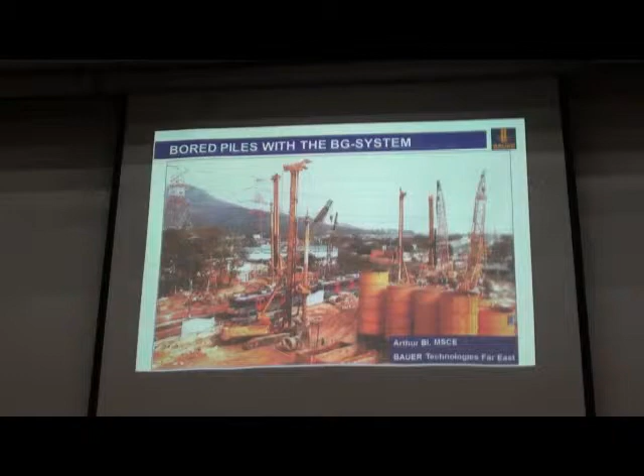In the second session, another 50 minutes to 1 hour, I would like to talk about the diaphragm wall. So let's start from the bored piles with the Bauer BG system.

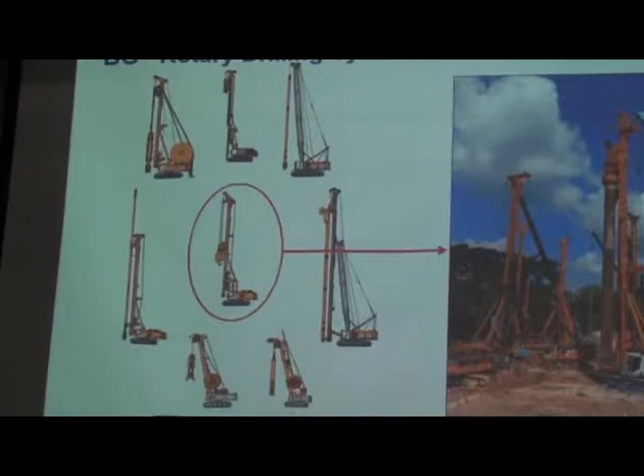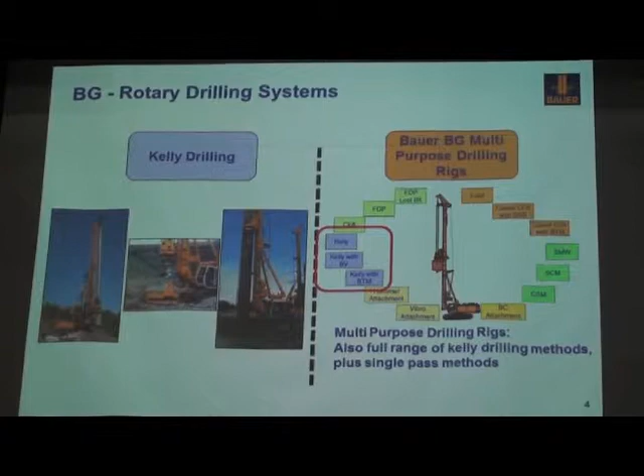There are also many different equipment we use for piling or boreholes. But this evening I only want to talk about BG, Bauer drilling equipment. In fact, the BG, Bauer BG, is multi-function equipment. You can have a lot of different attachments to do SMW or continuous flight auger, or even attach the cutter to do the diaphragm wall. But in Singapore or the surrounding area, I would say 95% or even more, we are only doing Kelly drilling. What is the meaning of Kelly drilling? It means you use the Kelly bar and the bucket or auger to dig the hole to make the piles. Or sometimes you have to install long casing, and for difficult ground conditions or big piles you may need an oscillator. So this evening I only cover what I call the Kelly drilling system.

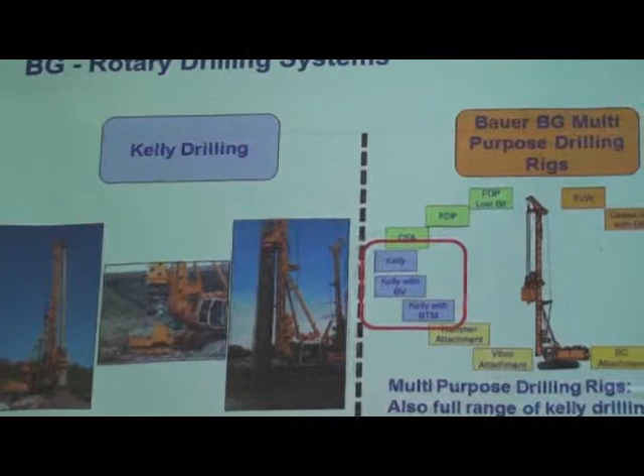So the typical method used in this foundation technology produces cast-in-situ bored piles for foundation piles, bridge piles, or you can also use this piling technique to make the wall, like a retaining wall, which we call a secant pile wall. It's also common in the market.

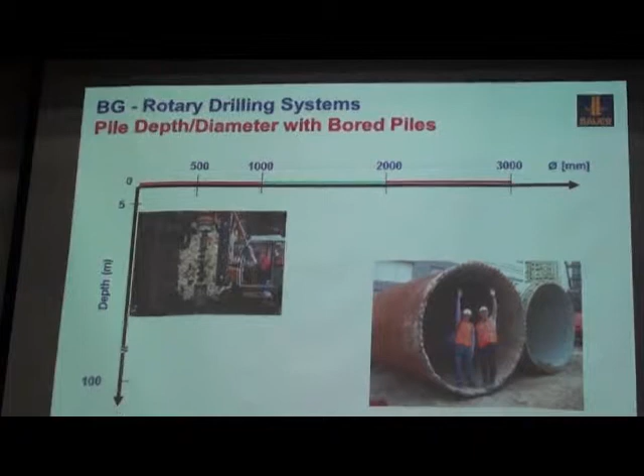How about the pile depth and diameter with this kind of method, bored pile drilling by BGs? For Kelly drilling, normally we talk about from 500 millimeters to a maximum of about 3 meters. In very special cases, 3.5 meter diameter piles have also been done in Singapore, on Market Street. The depth, nowadays with big machines, you can go down to 100 meters, or even 120 meters deep, by this kind of Kelly drilling method with drilling rigs.

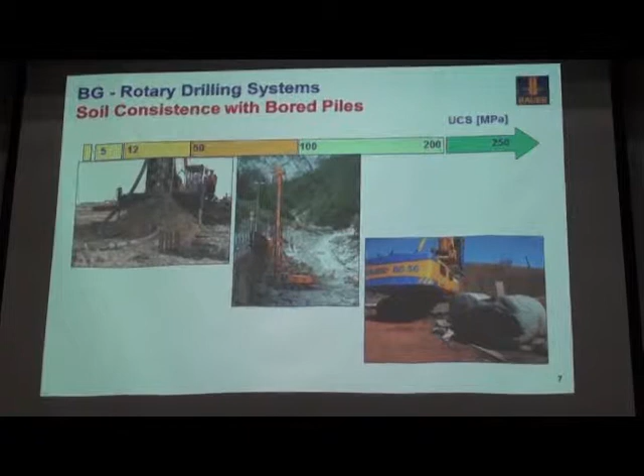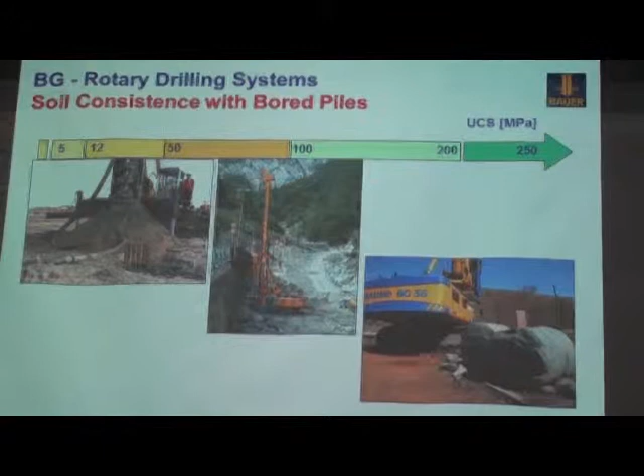How about this application with different soil conditions? For soil, or less than 5 MPa, I consider that the easy part. Then we come to fractured rock, up to about 50 MPa. UCS here means unconfined compressive strength of the rock. From 50 to 100 MPa, normally we call it hard rock. From 100 to 200 MPa, very hard rock. From 100 to 200, normally in Singapore we are talking about G2 rock already, or even sandstone boulders. I think the maximum rock strength drilled by this kind of method, Kelly drilling by the BG, would be about 250 or even about 300 MPa.

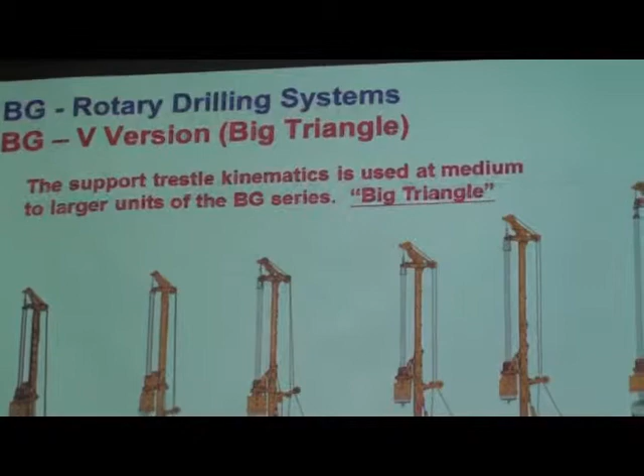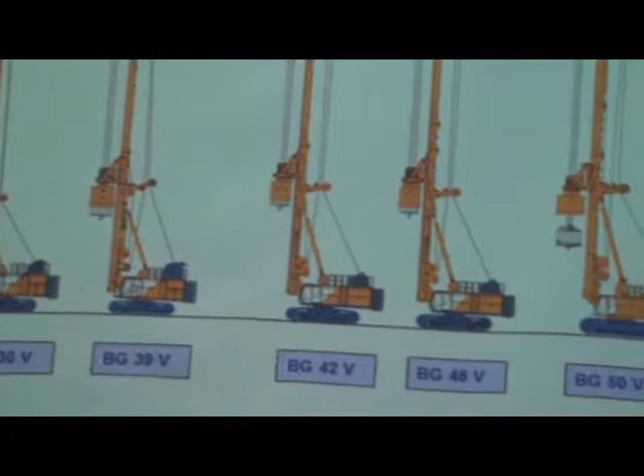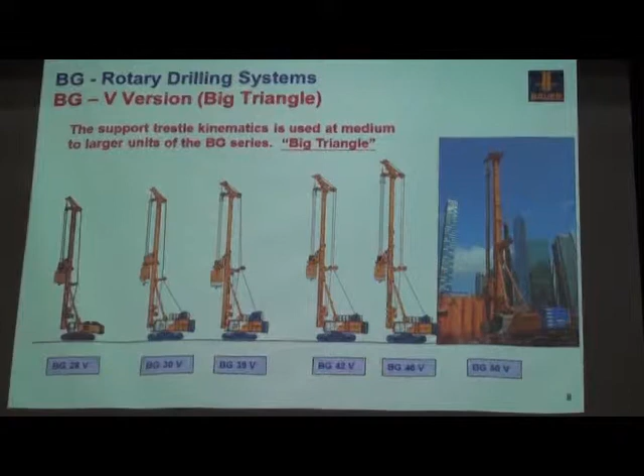In Bauer's production line of BGs, we have 2 production lines. First, I call it the V version. For the V version, first we look at the support kinematic system, or what we call the big triangle. What's the meaning of the big triangle? You can see the support system from the side. The big triangle supports the machine, because especially when doing big diameter or hard rock drilling, you need very strong support for the machine and the mast to resist vibration. The support system is not only from the side but also from the back, so this big triangle means you have big support from the side and also from the back. This is one of the machines, the BG46, used in Marina South to drill 2 meter, or even up to 2.5 meter diameter piles, down to 100 meters or 105 meters deep.

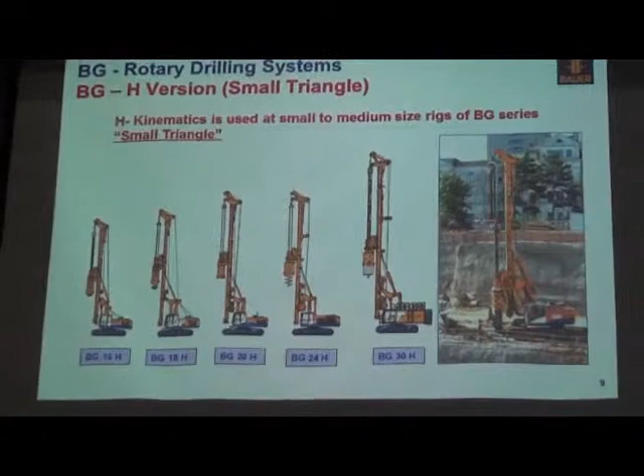Another production line I call the H version, or small triangle. If you look at the system, the supporting triangle is much smaller from the side and also from the back. This is the small to medium version of the BGs. In the market, just talking about Singapore, I think we have about 120 or 130 BGs working in Singapore.

I would say nearly 99% or 100% are V version, because here we have hard boulder, hard rock, and even very big diameter piles.

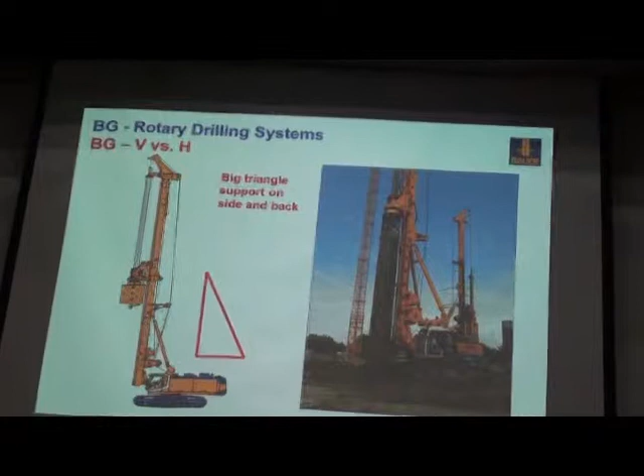So let's look at another comparison: big triangle and small triangle, not only from the side but also from the back. I think it's easy to make the example: a man or guy standing wider and lower is more stable. Big triangle versus slim, small triangle - the small triangle is not so stable compared with the big triangle.

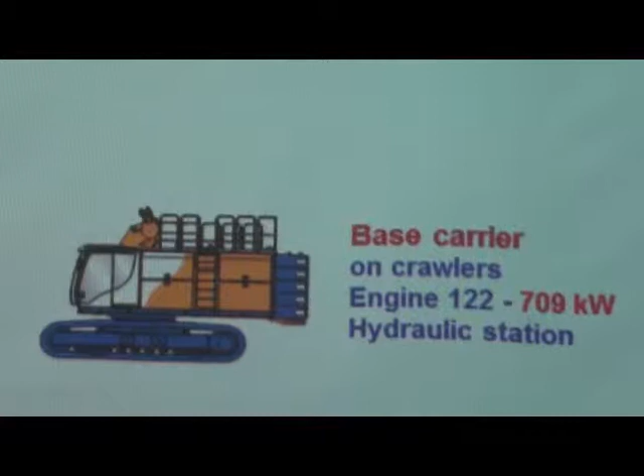So let's look at the BG main components. First, the base carrier, which is on crawlers so it can move to any place easily, with the engine supplying required hydraulic power. Nowadays, the big BGs have engines up to about 700 kilowatts.

Then we need a mast. The mast connects to the base carrier and extends to the required height to provide enough height for drilling deep piles. One important thing is it must be torsion resistant, because when drilling hard piles, especially hard rock, the reaction will for sure make your mast shake. So this must be torsion resistant.

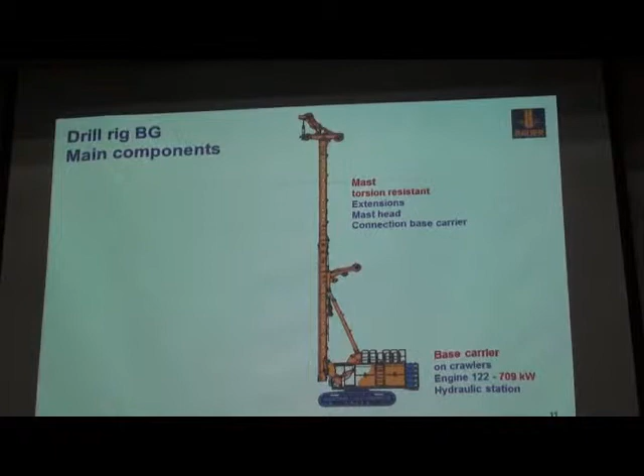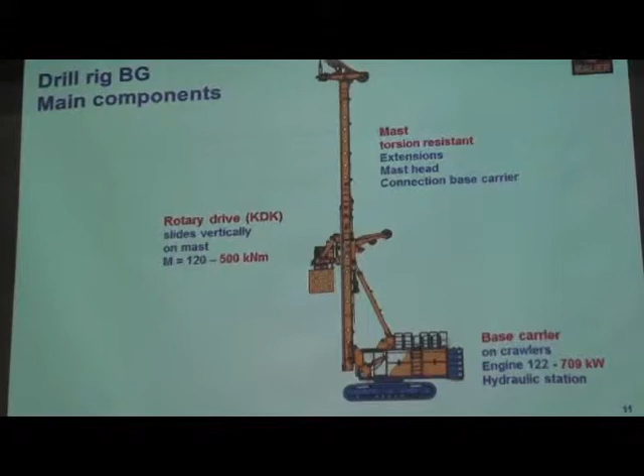Then we come to another key component, the KDK, or rotary drive. The rotary drive slides along the mast to provide the required torque for driving the casing or the Kelly bar to drill the piles. This KDK can provide 500 kilonewton meter torque for pile drilling or installing casing.

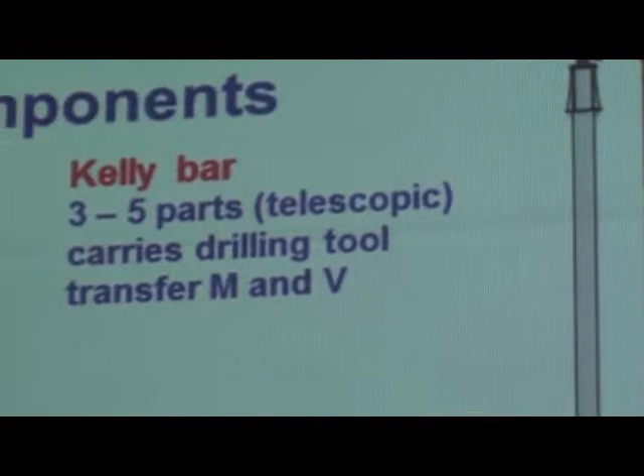Then we need the Kelly bar. The Kelly bar is a telescopic, either 3, 4, or 5 parts, extendable, to transfer the required torque and vertical force to drill the piles. Then you also need the drilling tools, which depend on the soil or the rock. You select the tools accordingly - later I will give more details.

Then you need the main winch. The main winch nowadays can go up to 600 kilonewton, meaning single line pull up to 60 tons already. This is because a lot of big piles are needed for high-rise buildings or even for bridge projects.

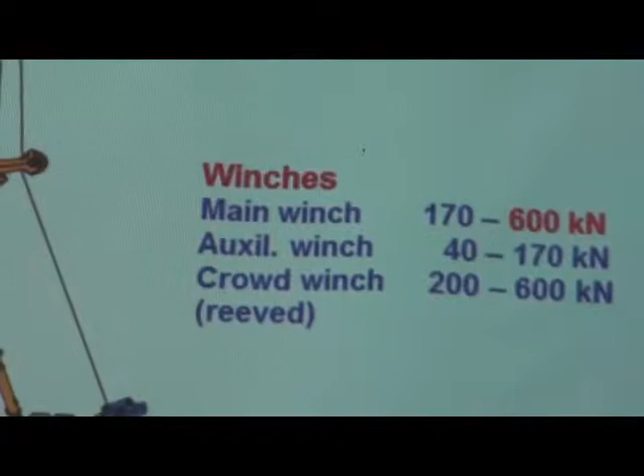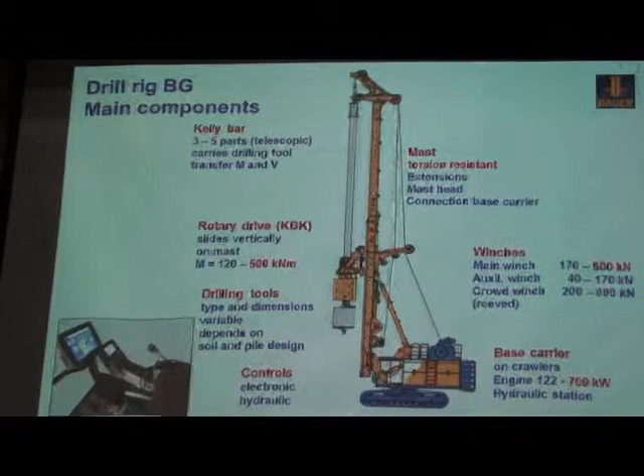Then the control system for hydraulic and electronic control of the pile drilling, with a visualization monitor. Any operator, anytime, can see the depth, torque, everything - it's easy to control the whole process.

So let's take a few minutes to look into the details of how this slurry pile has been done.

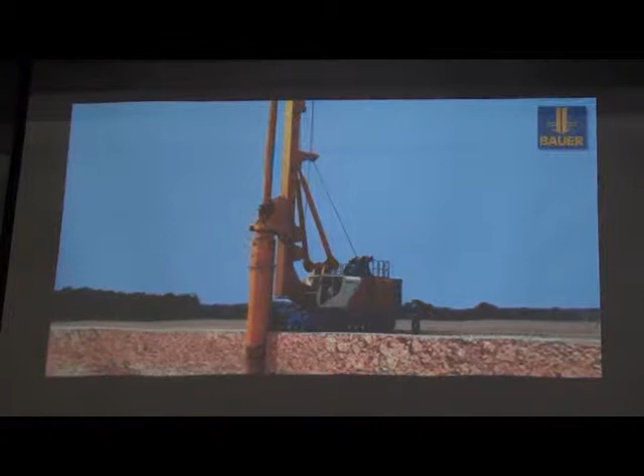First, for the slurry pile, you need to drive in the top casing, normally installed until the stable ground. This part we call KDK, connected with the casing drive adapter to drive in the casing. Then you start to drill. Of course, for the slurry pile, you need some tank or silo to supply the slurry during the drilling process.

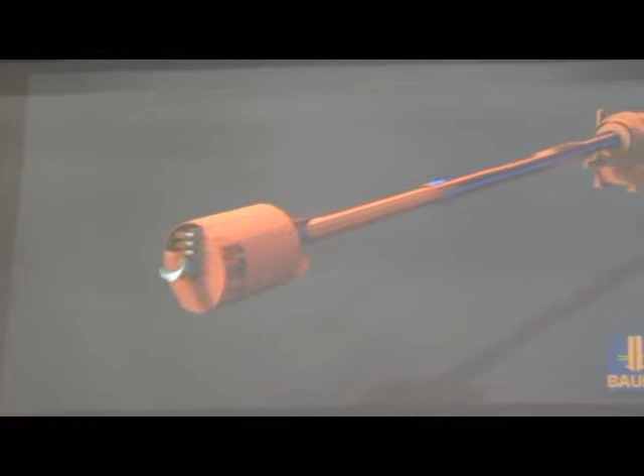This shows how the Kelly bar works. This is the KDK rotary drive, and this is the Kelly bar, a telescopic type Kelly bar. You lower it into the ground with a bucket. Then we need to lock it, because we have to transport the required torque and push force into the Kelly bar and the tools to drill the soil or even the rock.

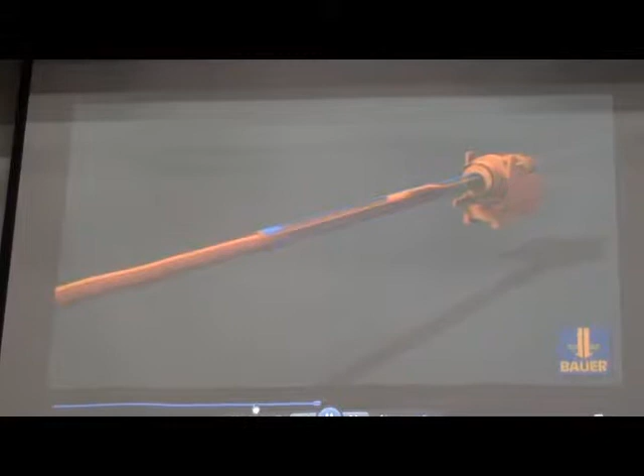After you drill one bucket, about 800mm or 1 meter, you unlock the Kelly bar, then retract it. You just repeat the whole process to complete the piles. During the drilling, you always fill the borehole with slurry - normally we use bentonite slurry.

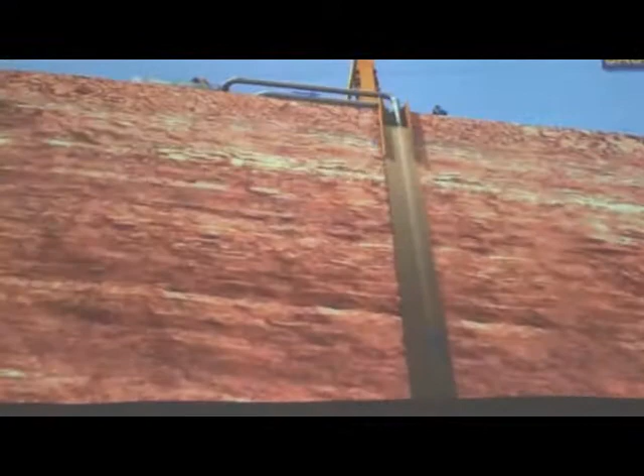One important thing for good pile quality: after you finish the pile drilling, we call it recycling. Because a lot of fine material is suspended in the slurry, you need to recycle it to keep the bentonite in good quality before installing the rebar cage and concrete.

In this recycling system, you pump back the thick slurry through this desander unit, filtering out all the fine material, then bring back better quality bentonite, or even supply the borehole with fresh bentonite. Then you install the rebar cage and do the concreting.

For the rebar cage installation, you can use the BG, but most of the time at the job site we prefer to use the crane, because we like to keep the BG busy, always in the drilling work.

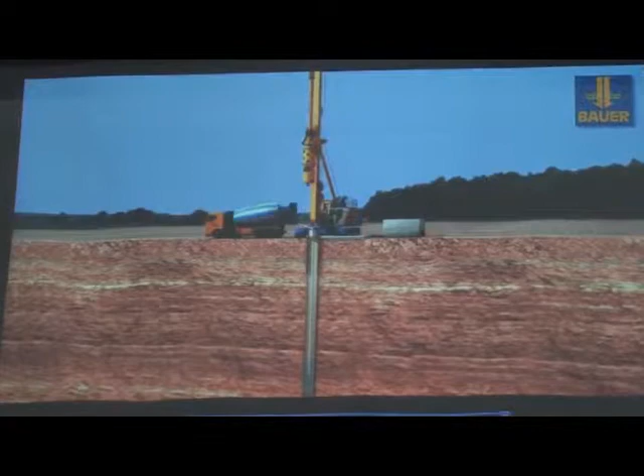So after you finish the concreting work, you use the BG, or sometimes the crane, to remove this top casing, and then you start another pile.

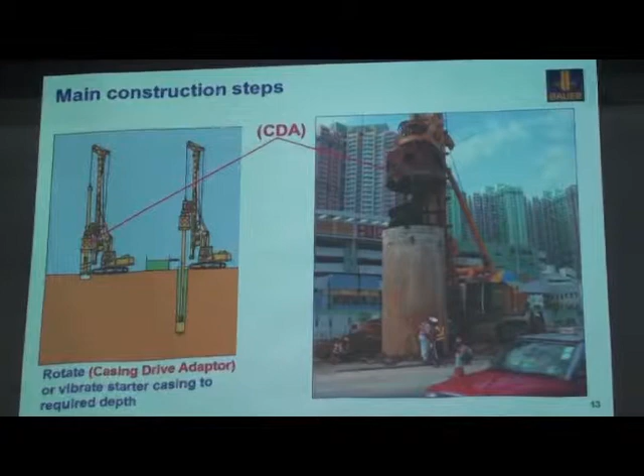Okay, let's look at the main construction steps, how we make the piles. First, you use the CDA, casing drive adaptor, to install the casing. For some projects, if the casing is very long or the diameter is big, then you may also use this top, I call it top vibro, to install the casing.

Then you start drilling. During the drilling, you always fill the borehole with the bentonite.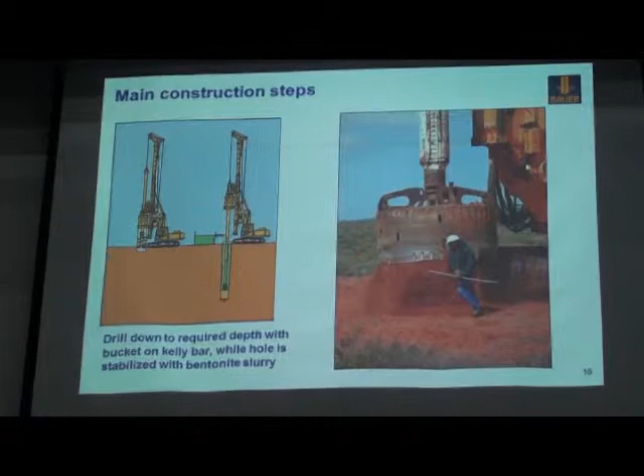Why I like to show these photos, I think I made last year in JB. You can see two big machines, BG46, very big machine, about 230 tons, drilling the big piles. One is just starting with the auger for the casing installation. The other already drilled down to about 50 or 60 meters with the big bucket.

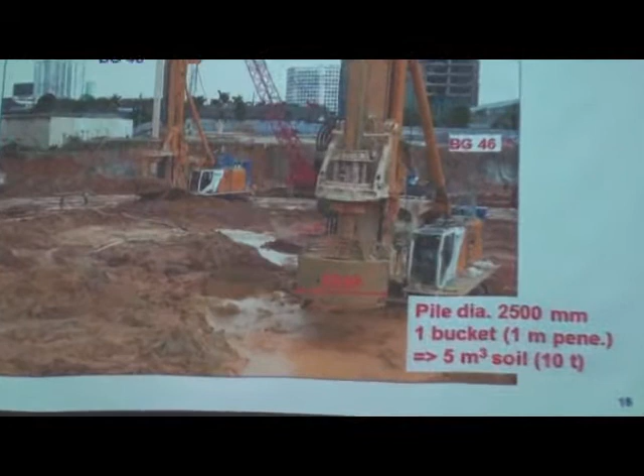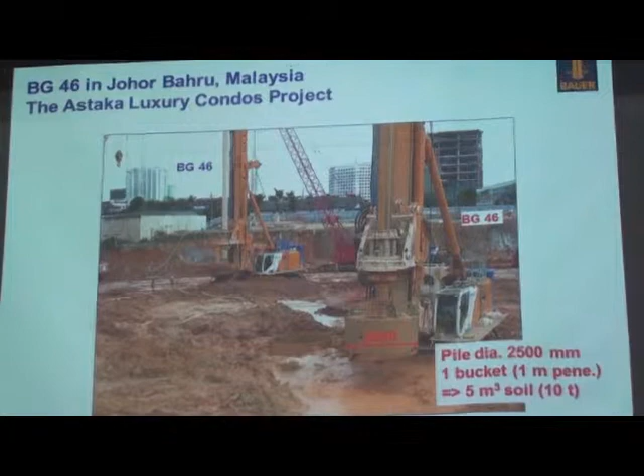And full of site, it's a mess. But please consider, for this kind of job, 2.5 meter bucket each time - if we drill 1 meter, we are talking about 5 cubic meters of soil, and 10 tons. So after a few buckets, if logistic arrangement on site is not proper, this is what you can see. So for the big piles, not only the drilling, but how to remove all this disposal is very challenging to the contractors.

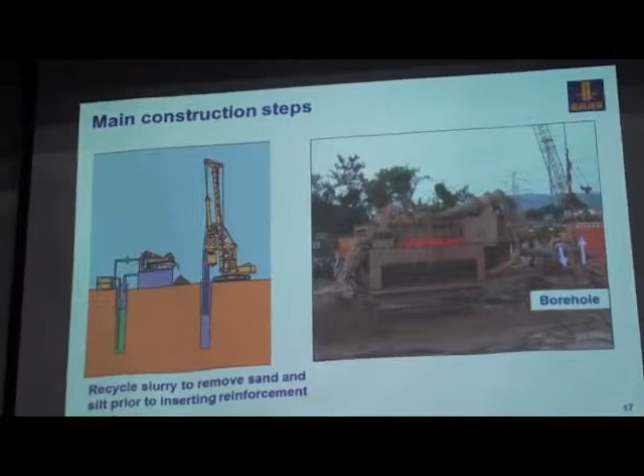Then after you finish the pile drilling, this is what I just mentioned, you need to do the desanding. You pump the thick slurry from the bottom through the desander, you filter out the fine material, sand, then you keep the bentonite in good condition before you install the cages and do the concrete.

Then, after desanding the pile, we lift the cage, normally by the crane, and do the cage installation. Then we do the concreting. During the concreting, the slurry will be pumped back to the silo or the tank.

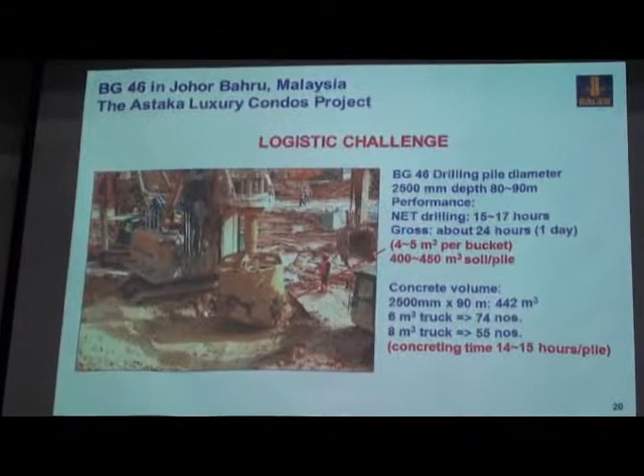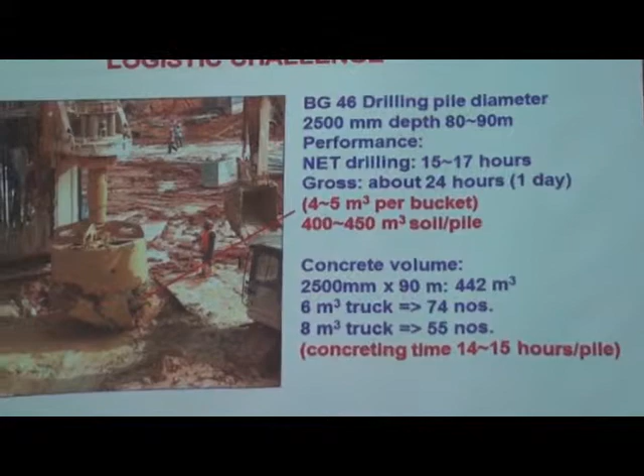This is another same job site. I think nowadays, especially for this big diameter pile, 2 meters or above, we are talking about 50, 60, even 80, 90, 100 meters. It's very challenging. For the contractors, no matter if it's the main contractor or even the pile contractor, how do you do the proper logistics - first, how you arrange to send out this disposal.

This project, no hard ground. Every day you can finish 1 pile, 1 machine. It means about 450 cubic meters of soil. So 2 machines in 1 day can easily generate 1,000 cubic meters of soil on site.

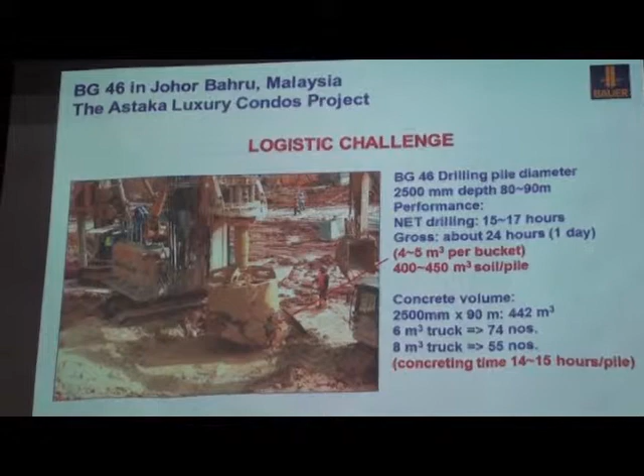Second, if we look at the concrete volume per pile, we're talking about nearly 450 cubic meters. And how many trucks required? A 6 cubic meter truck, you need 74 numbers. An 8 cubic meter truck, you need 55.

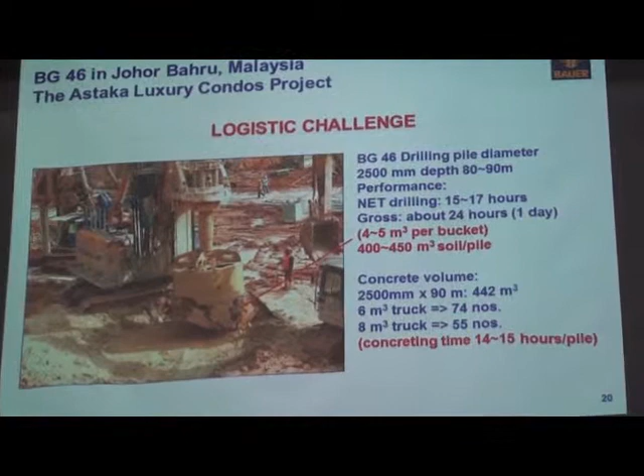And once you start this concrete process, you cannot stop. So each pile, only the concrete time, you need about 14 to 15 hours. I think this is really the big challenge when we are talking about this big pile drilling.

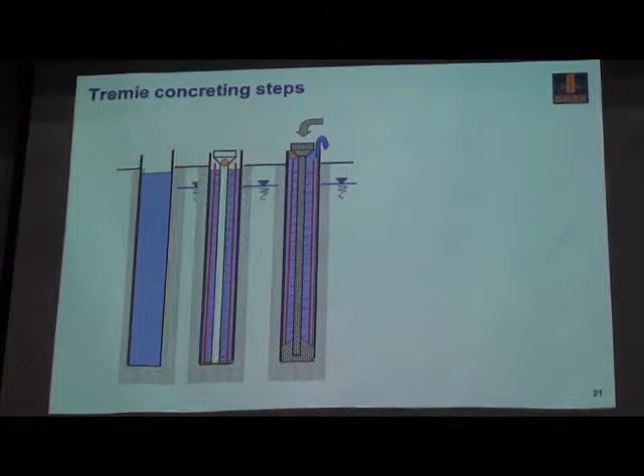So, tremie concrete. You finish the pile, we install the tremie pipe, the hopper. Normally we have the rubber ball to separate the slurry from the concrete. And you start pouring the concrete, then pump back the slurry to the storage tank or silos. Then from the bottom, gradually concrete to the top. Then you finish the pile concreting.

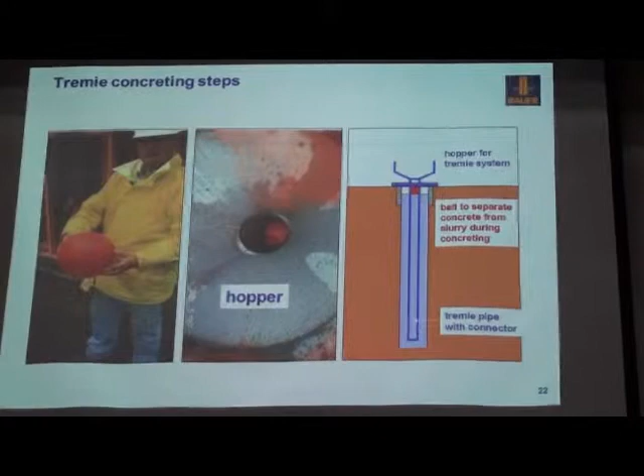And this is the detail - what's the rubber ball look like? Its function is to separate the concrete from the slurry during the concreting.

We are talking about soil drilling. How about rock? I think in Hong Kong or in Singapore, a lot of the areas we encounter the rock, especially with some designs purely end bearing, so you have to go into the rock.

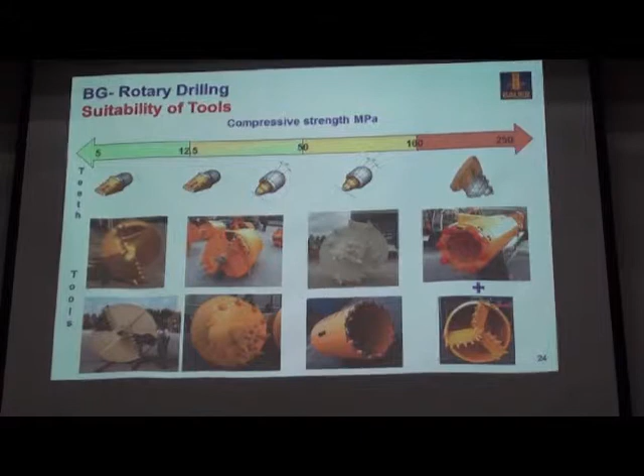Then it's important to understand how we select the tools or even the teeth for soil drilling and for rock drilling. This chart shows you the different types of teeth. Starting from this type, I call it flat teeth, which works for normal soil until the rock strength about 15 or even 20 MPa. Other than that, we need the bullet teeth, or we call RSC teeth.

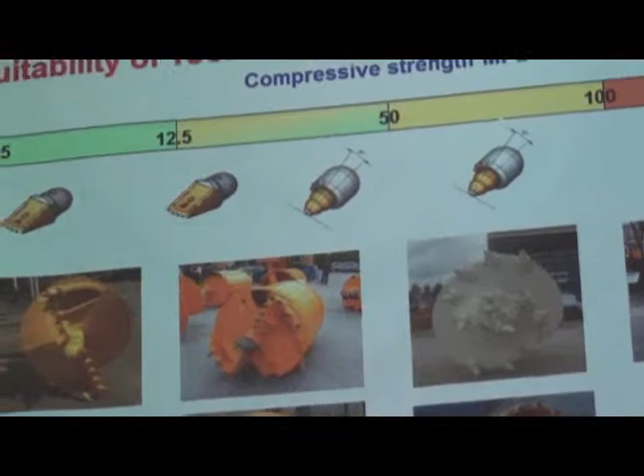Then from about 20 to 80 or 100, of course, depending on the different type of teeth, you can have different type of tools like the auger or the bucket.

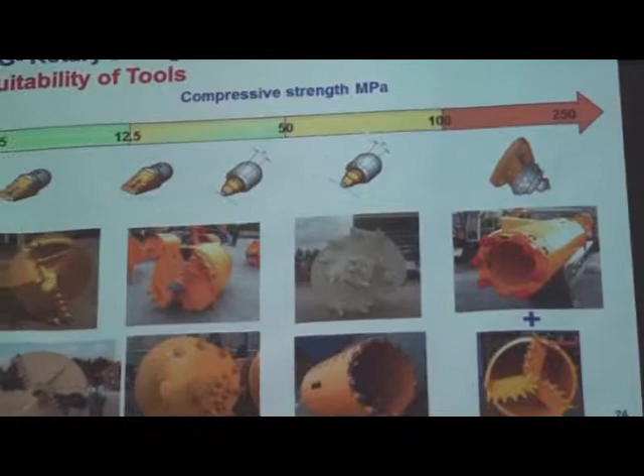How about the rock strength or boulder strength? More than 100. I think you can find in Singapore even boulders or G2, or even sometimes G3 or more than 100. Then we need roller bit, and even the cross cutter. Even these tools combined to drill into the hard rock efficiently.

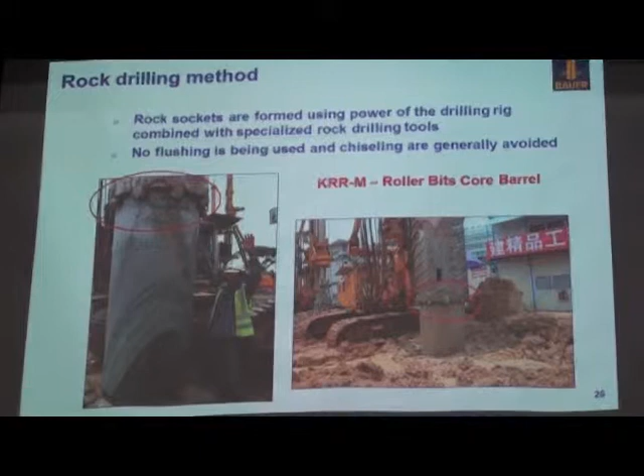So for the soil drilling, we need the tools and the teeth design to have high penetration, but you don't need the big force, high torque. But when we look at hard rock, no matter it's a boulder or very hard granite, we are talking about rollerbit. It's the key weapon when you are dealing with this kind of very hard rock.

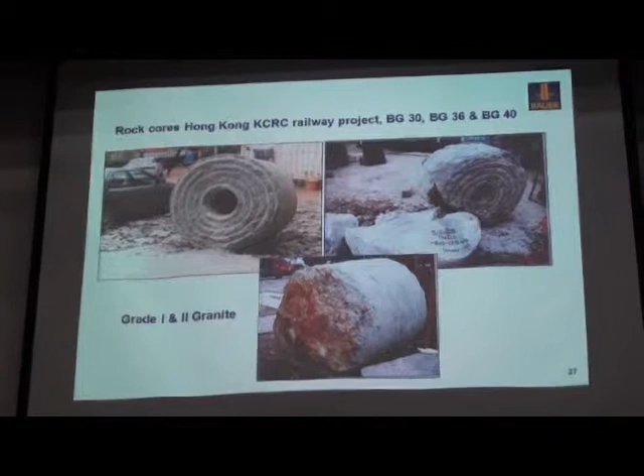This is the hard rock drill in Hong Kong, KCRC. We are talking about, I think the Hong Kong spec is very similar to what you used in Singapore, called the G1 or G2 granite. I think G2 granite can easily go up to 200 MPa.

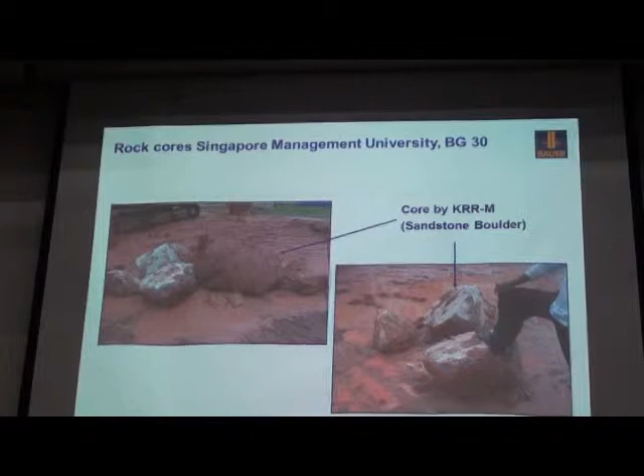How about Singapore? I think Singapore is very famous for the powdery clay. This is the first project I got involved in, in the year 2003, as a new project. I still remember the first day I arrived on the job site, the customer told me very hard boulders he encountered.

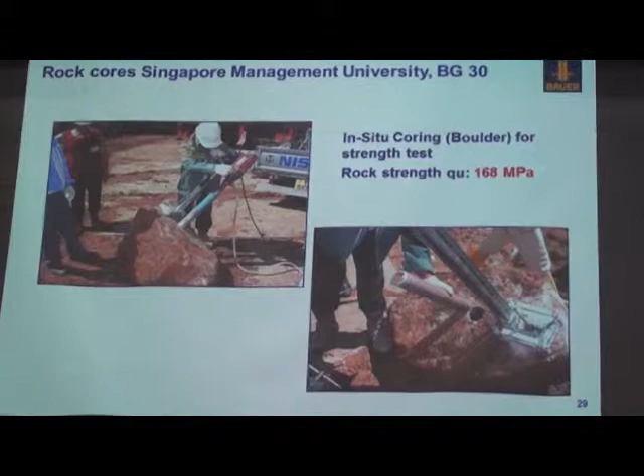Then I asked what's the strength. He said about 100 or above 100. So after we drilled out some boulder, we took it on site and tested it. Honestly speaking, it surprised me, the strength was up to 168.

Of course, in Singapore, we have G3 and also G2 rock. Especially G2, we are talking about the strength up to 150 or even 200.

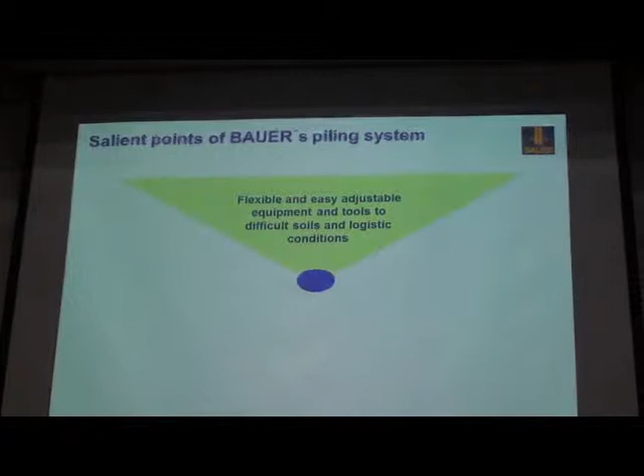So what's the salient points when we're talking about using the Bauer BG or piling system? I think it's flexible and easily adjusted equipment, and also with different tools to drill in not only the soil but also the hard rock. Short setup time, normally we're talking about 1 or 2 days.

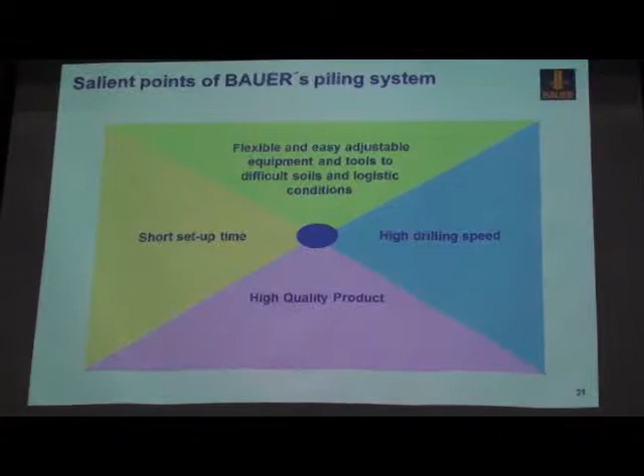You can get the equipment ready to work on site, and with high drilling speed, because of high torque and the big winch. And of course we are quite proud of our product, the BG.

Then I would like to talk about this, because it's bored pile. During the drilling we're talking about the bentonite slurry. In recent years, a lot of people have started to use the polymer. Why do I still want to talk about bentonite instead of polymer?

So tonight I still want to talk about bentonite slurry. In fact, bentonite has been used in this kind of work for more than 50 years. Bentonite is a special clay that swells and gels after it's dispersed. Normally we are talking about a mixing ratio of 3 to 5%, and after mixing you wait about 4 to 8 hours, or the next day you can start using this bentonite slurry.

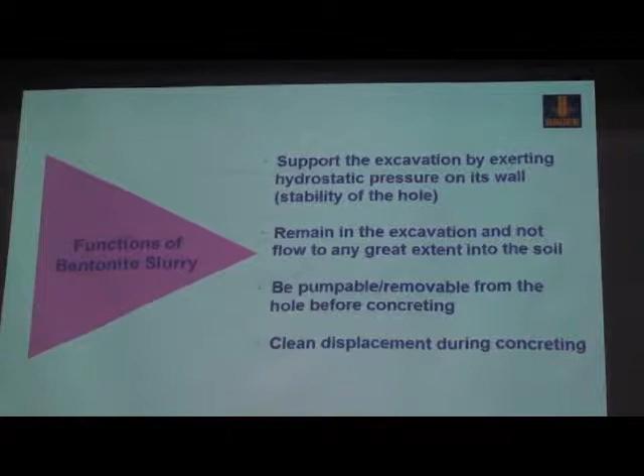The function of the bentonite slurry: first, to stabilize the borehole during the drilling. Second, the slurry has to remain in the excavation or borehole, not penetrate anywhere. And the third point, it should be pumpable before concreting. And during the concreting, the concrete should easily replace the bentonite. This is the function of the bentonite slurry.

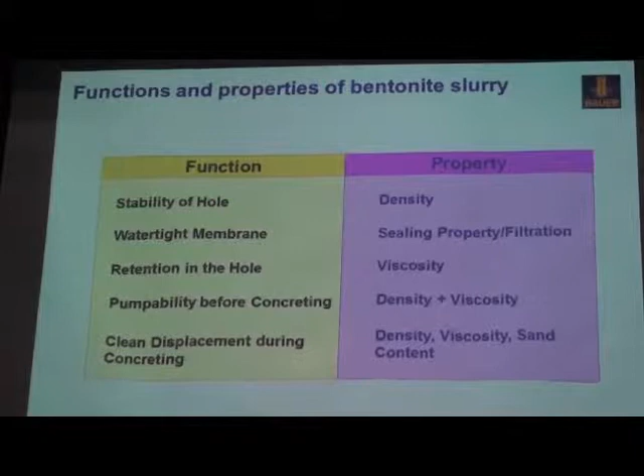Once we know the function of the bentonite slurry, then what's the property required for the bentonite, or what property do we want to check during the piling process? Here you can see we're talking about density and filtration, and sometimes density plus viscosity, and of course also sand content.

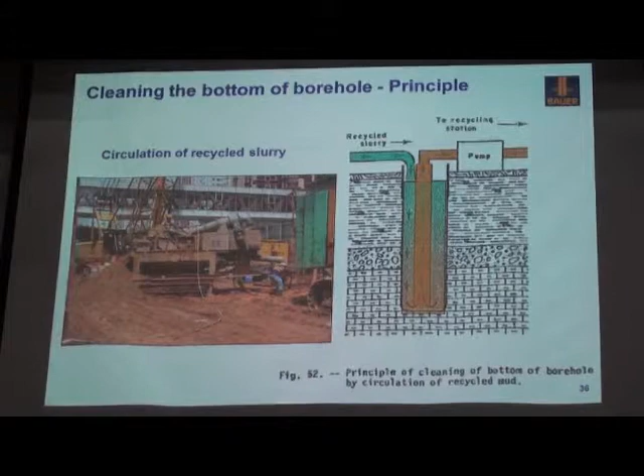Again, to have good pile quality, I keep emphasizing this recycling is very important, because we want to have good bentonite before we install the rebar cage and do the concreting.

This is to have a clean base. Then we have the pump to pump the thick slurry from the bottom and we supply the fresh or good bentonite to replace the thick or old slurry. And then here you can see all the sand are separated from the working bentonite.

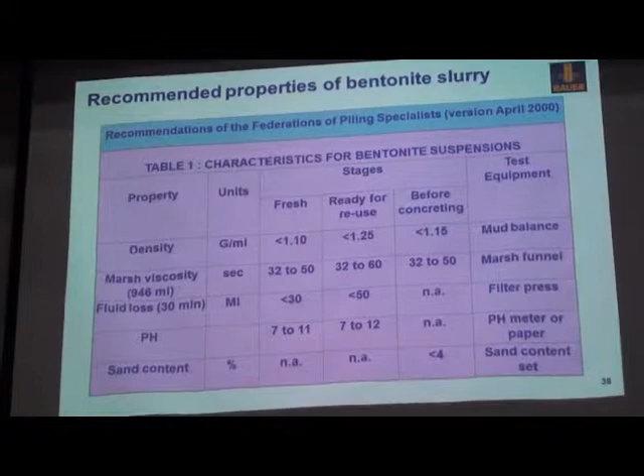What's the spec for the bentonite slurry? Here is the general recommendation from the Federation of Piling Specialists.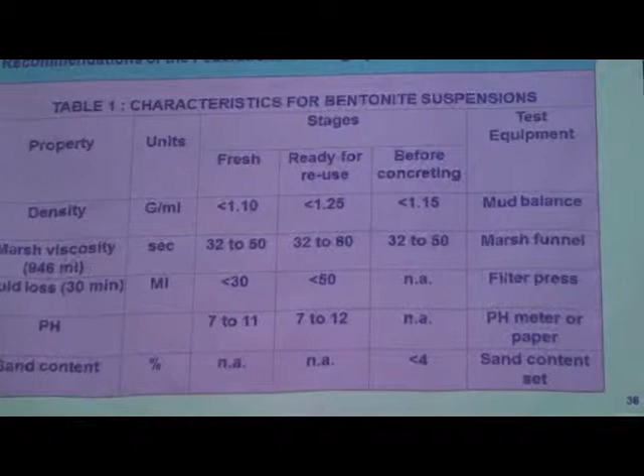Fresh, ready for reuse, and very important, before concreting you have to check the density, viscosity, and the sand content. Normally, if you do the proper desanding, the sand content will be less than 1%.

Quality control for the piles. Now I would like to talk about the quality control, the items for quality control. It may not cover all, but this is typical.

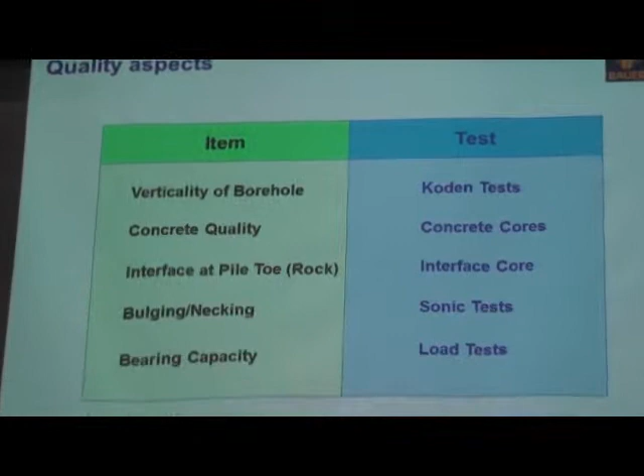First, some countries may like to check the verticality of boreholes. For bore piling, normally we are talking about the verticality requirement of about 1 in 80. Some special cases, we are talking about 1 in 100, but very rare. And most of the cases, they don't even check the pile verticality.

Concrete quality can check the cores. And interface - I think the interface at the pile toe, especially for rock drillings, is quite common. In Hong Kong, they like to take interface coring. And bulging or necking can have the sonic test. And for bearing capacity, the most popular, even nowadays, we still use the static load test.

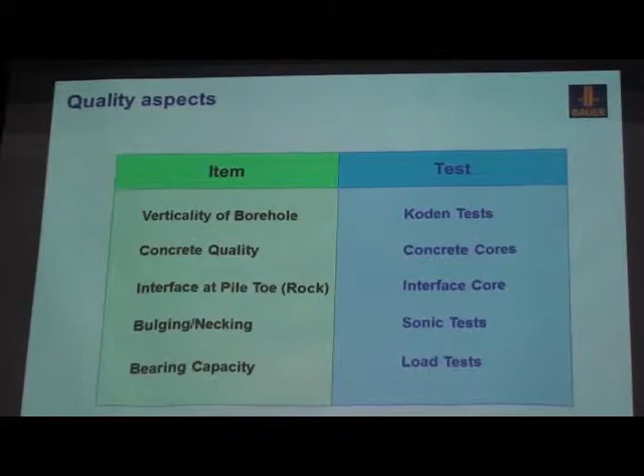This is the equipment used to check the pile verticality. In the past 30 years, even up to now, the industrial standard will be the Japanese product. There are also some other brands, even Chinese products, nowadays in the market. But to me, I would still like to recommend this.

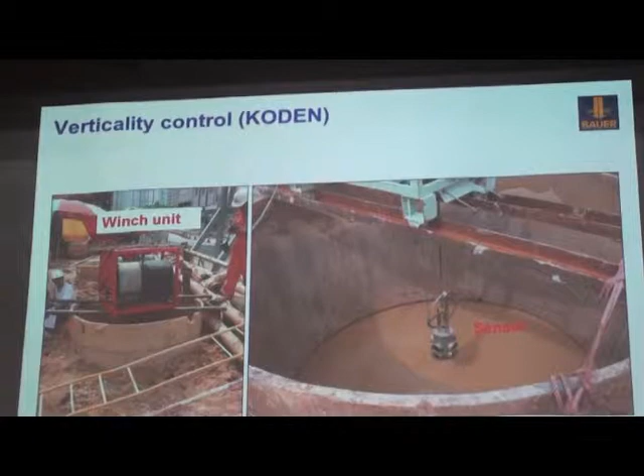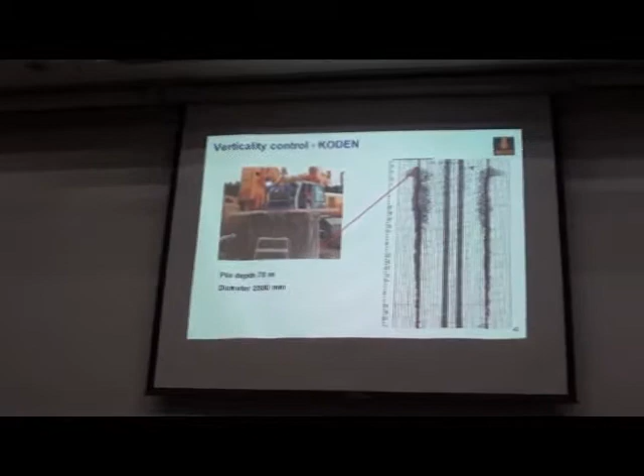Industrial standard, please, if possible, still use the Koden, it's more reliable. You have a sensor placed in the center of the pile. You lower it down to the borehole, and with a winch unit, you can check the pile verticality. This Koden can go down to about 108 meters deep.

And this is the top casing. You can see very clearly from the top casing the verticality. This is the concrete core to check the concrete quality of the piles.

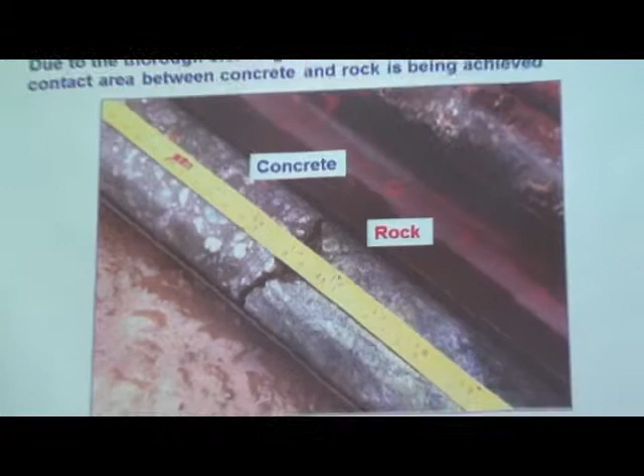After proper desanding, this kind of very clean interface can be reached, with nearly no sediment between the concrete, the pile, and the rock.

And I think the slump of the tremie concrete is also very important because we are doing tremie concrete and we need higher slump. Normally for this tremie concrete we are talking about slump 180 to 200 millimeters.

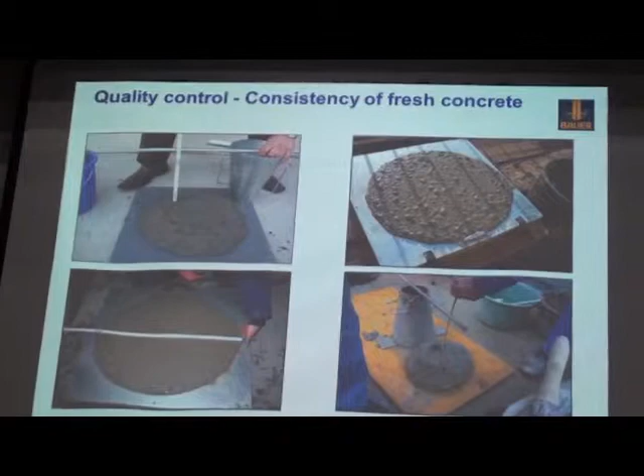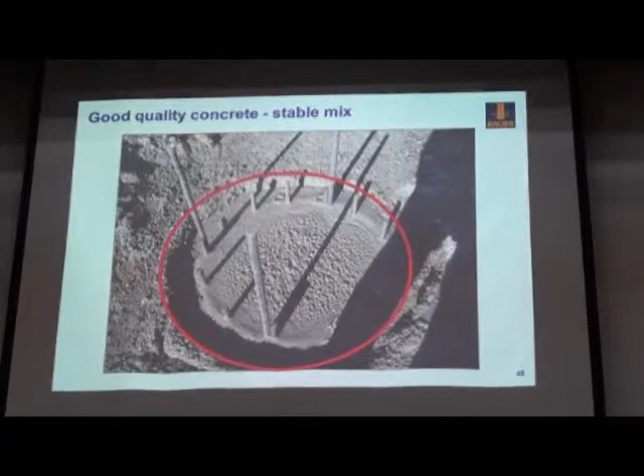This is very stable and good mix after you extract the top casing. This one, I think, has sufficient elasticity. Yeah, you can see it's very dry.

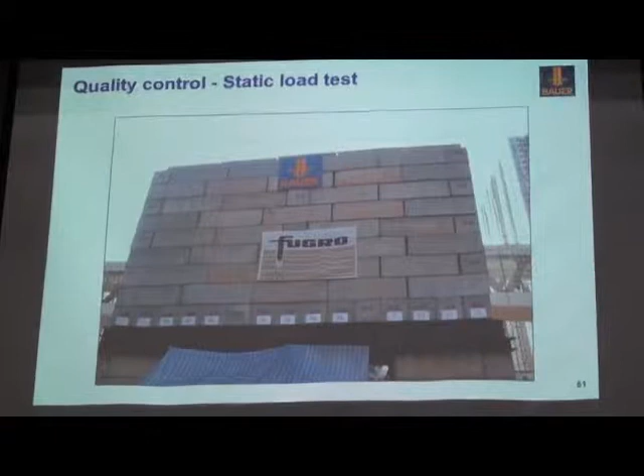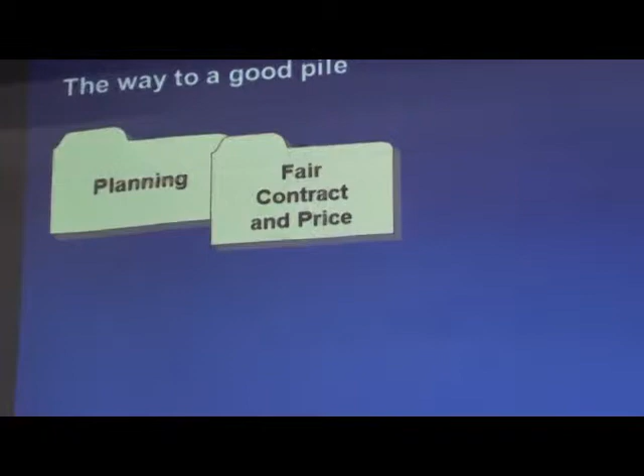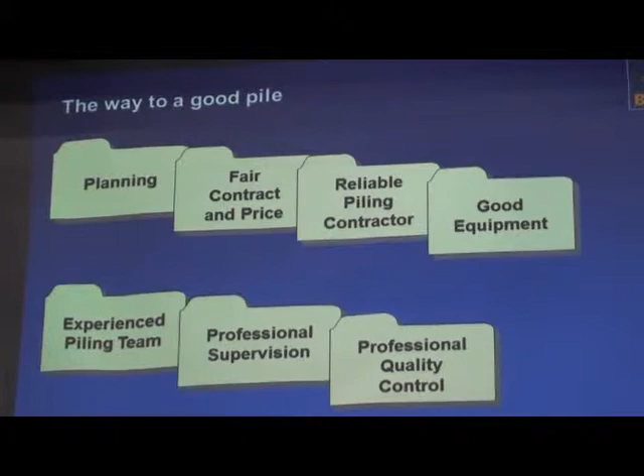So for a short summary, the way for a good pile, we're talking about bored piles, slurry piles - first, need good planning, fair contract prices, reliable piling contractors, good equipment that can drill not only soil but also hard rock, an experienced piling team including foreman, operator, banksman, and professional supervision, professional quality control. Then you can have good quality piles.

So after this bored piles topic, I come to the next one. I would like to have a short introduction of the secant pile wall.